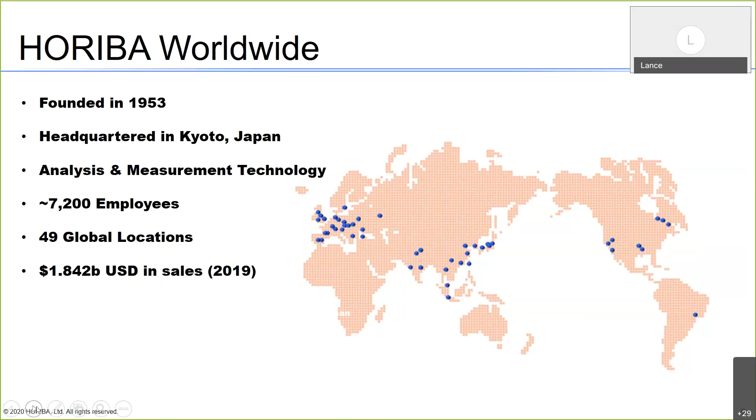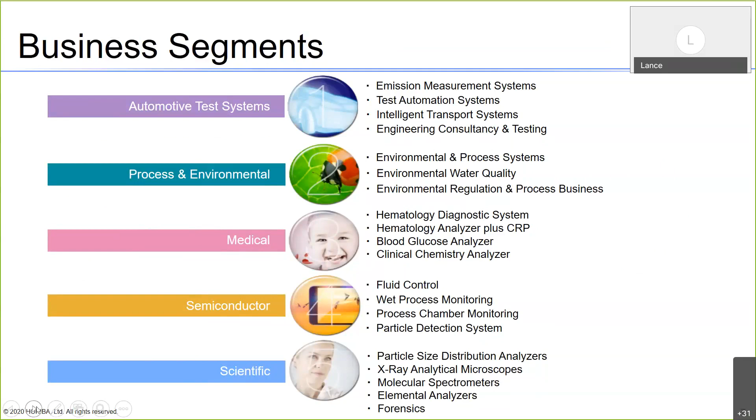So where does that 1.8 billion come from? Well, there's five different divisions under the HORIBA umbrella. There's the automotive test systems. There's the process and environmental, obviously that's ours, which also includes water quality. We have the medical, we have the semiconductor, and we have the scientific division. So all of these divisions make up the company that you know as HORIBA.

Specifically to the Americas, you can see here, these are all of our sites in both North and South America. For the Process and Environmental Division, we are specifically located in Irvine, California. We have some project management and admin all handled out there. And then we have our new office that we opened back in 2018 in Pasadena. If you're not familiar with Pasadena, it's a suburb of Houston, just a little bit southeast. So we're very close to quite a few of the major petrochemical players down there.

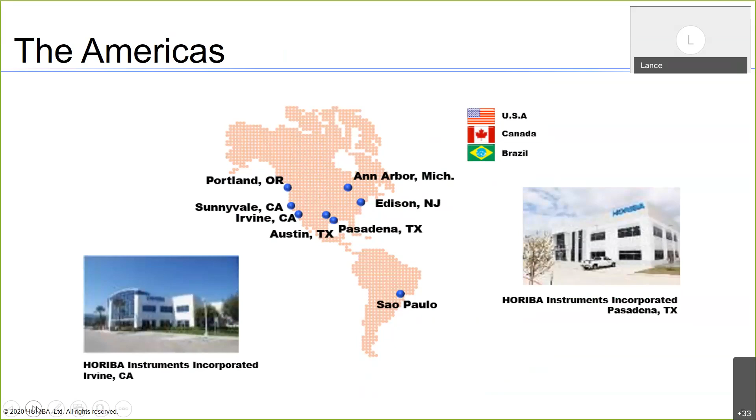A bit more detail about the HORIBA Houston facility, HORIBA Pasadena. It was originally founded back in 1985 by Cameron Process. We purchased it in 2012 and opened this shiny new building back in 2018. It houses 100% HORIBA employees. And who are those employees? They are CAD designers, project managers, electricians, mechanical engineers, manufacturing, inside sales. Norio's office is actually in this building, so quite a bit happens.

We're very happy about the manufacturing capability as it stands now. With the exception of the PG portable analyzer, which was also one of our webinar series topics, all of our products are now manufactured out of the Houston office, so we're very happy about that.

Some general overviews as far as what some of the capabilities are from our Houston facility. We can do analyzer shelters, analyzer racks, analyzer enclosures. We've got quite a bit of flexibility from that perspective. That's all the way from engineering, design, fabrication, to project documentation, installation, commissioning, you name it, we have experience doing it. We offer field service and embedded service contracts.

So if you need a preventive maintenance call, or if you need support, we can certainly offer that. And if you have multiple HORIBA units, we can explore the opportunities as far as having embedded service personnel at your facility to make sure that those analyzers are up and running on a consistent basis. We also offer RATA testing. If you have any questions about that, please feel free to reach out to Mick or myself, and we'll be happy to have that discussion with you.

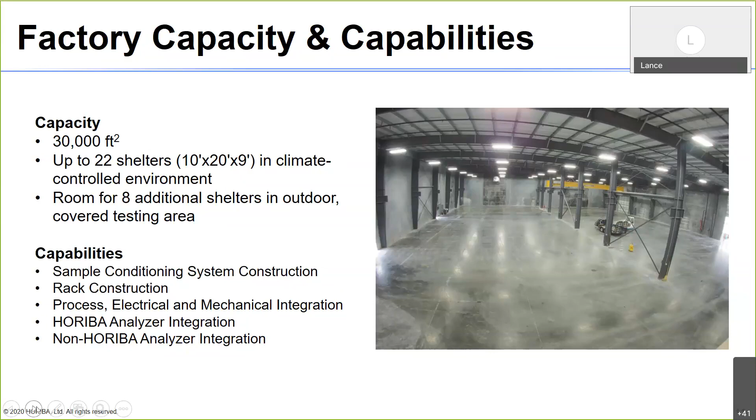But I think a little known topic is our ability to integrate non-HORIBA analyzers. If you have an analyzer, say you have a GC, or you have a mass spec, or a turbidity or opacity, if you have one of those analyzers and you need to put it into a shelter or enclosure, we have the experience to be able to do that. We've done it with multiple different vendors. And so if you have a need for that, please reach out to Mick or myself, and we'll be happy to help coordinate that with you.

The products that we offer, obviously, there's the process gas analyzers, which is the GA-370, the topic for today. We have ambient air monitors, process gas analyzer as well, the VA5000, the multi-gas analyzer. That was also one of our webinar series topics. Go to our YouTube page. The PG300, our portable gas analyzer, also on the YouTube page. You'll find that webinar. The flagship of all of our gas analyzers, our CEMS unit, the ENDA-7000, and then the particulate monitor, the PX375.

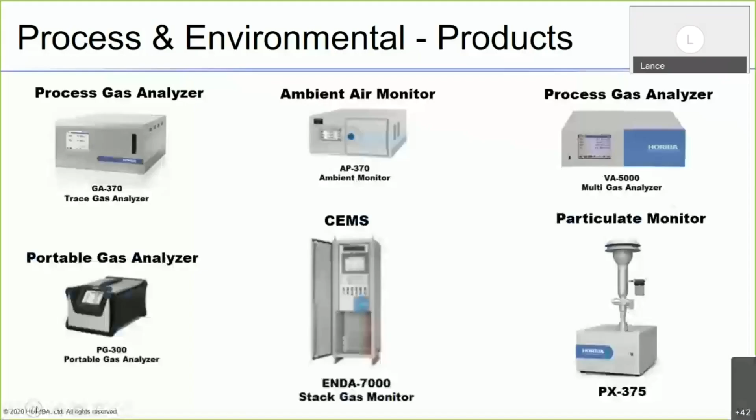All right, thanks, Lance. Good morning, everyone. My name is Norio Kobayashi. I am a product specialist with HORIBA. I've been with HORIBA for about 15 years, from Japan, and transferred to the US and working in the US for 6 years. Today I am so happy to show you the introduction of the GA-370, which is the trace gas monitor. And here is today's outline: the product overview, the applications, and why GA-370 is recommended for those applications.

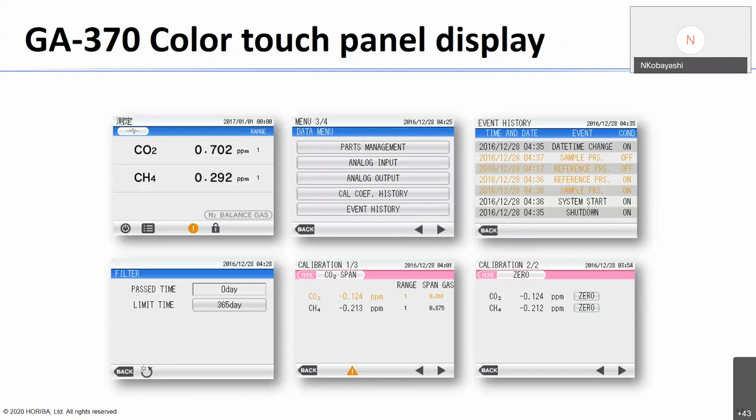All right. The next page is showing the comparison table compared with other companies' ones. As you can see, the GA can pick from many selections like CO, CO2, CH4, N2O, SO2, and siloxane, while the others have fewer selections. And also you can measure up to 2 parameters, while the others measure only 1 parameter, which is a great advantage.

What you need for the operation is reference gas. You will need to prepare pure nitrogen or clean instrument air. If it's not clean enough, we can prepare a purifier unit, so we can clean it up to produce reference gas. For the range setting, you have 1, 2, 3, 4 range settings right there, from 1 ppm and 2 ppm, 5 ppm, 10 ppm. So you can have multiple ranges there.

And when you look at the repeatability or linearity, you can see plus minus 0.02 ppm, which is very, very good compared with the others, like 0.1 ppm or plus minus 0.1% full scale. So that is the great performance here.

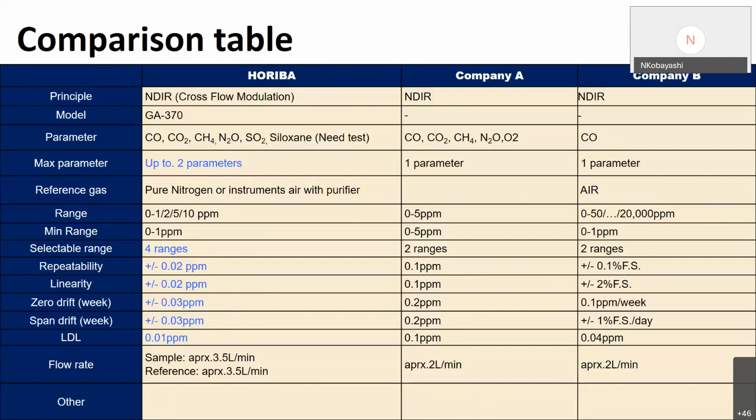All right, let's talk about some applications. Air separation unit, the cryogenic air separation process. They use the differences in boiling points of the components to separate air into the desired products, like oxygen or nitrogen or argon. So they just put in the air, separate the components inside, and extract the necessary components to produce their products.

These three gases, oxygen, nitrogen, and argon, represent about 99% of dry ambient air. Nitrogen is about 78%, oxygen about 21%, and argon about 0.9%. The rest of the other gases must be removed properly in the air separation process. The target components will be water vapor, carbon dioxide, and hydrocarbons.

The reason why we need to remove those is to ensure safety, efficient plant operation, and product purity. We want to keep an eye on each important point, to make sure those other gases have already been removed well. So that is the role of the trace gas analyzer. Again, the role of the trace gas analyzer is making sure each process worked well.

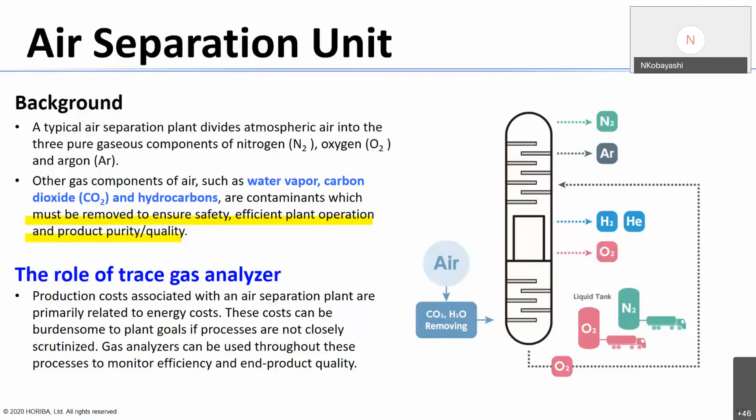Before you go to the next process or final product stream, you want to make sure its quality is good enough to go to the next stage. If it's not enough, then you will need another round of the process. This will sacrifice a lot of energy, cost, and time. So monitoring each point contributes to proper operations.

Let's go deeper into air separation. So this is the rough sketch of the separation unit process. The ambient air goes through the filter, which captures all of the dust in the ambient air. And the air is then compressed and goes through a molecular sieve process to remove H2O and CO2.

Because if the forward process contains H2O and CO2, the formation of ice or dry ice may occur in the cooling process. The cold box inside is going to chill the air to minus 173 degrees C. It's extremely cold. So before entering the cold box, you want to remove H2O and CO2 completely. So now I guess you understand why monitoring CO2 with high sensitivity is extremely important. Because CO2 in the air has to be zero.

Then the cold air goes to a distillation process, and your gas is going to be chilled more. And at each point in the distillation process, the gas comes off as product streams: nitrogen gas, argon gas, and oxygen gas. Each product stream comes off at a different point.

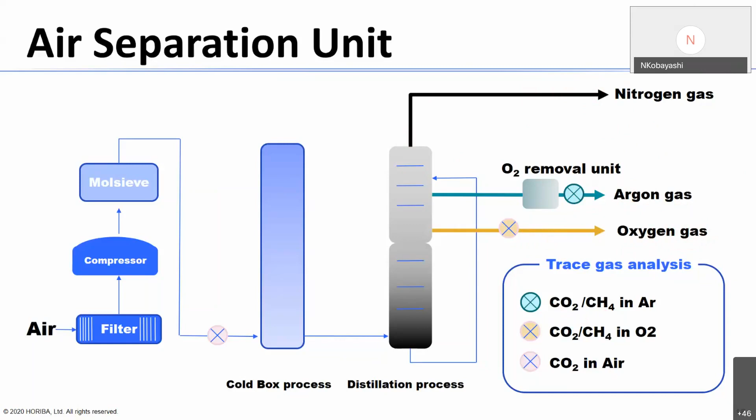Here's more explanation of each sampling point for trace gas monitoring. The trace CO2 measurement before the cold box process: like I explained, the CO2 needs to be removed from the feeding air prior to introduction to the cold box process. Also, you may want to monitor after the cold box process to see the efficiency of the heat exchangers. So typically, the CO2 monitored in this process is in the 0 to 10 ppm range.

The CO2 and the CH4 are monitored in O2 product streams right there. And the CO2 is an especially unwanted component in the product streams because of the oxidizing potential. And the typical measurement range at this point is 0 to 1 ppm, and at some points could be maybe 10 ppm.

Another trace CO2 and CH4 measurement is in argon product streams, right there. The typical measurement range is 0 to 1 ppm. So you are required to measure extremely low concentrations, low concentration control at this point.

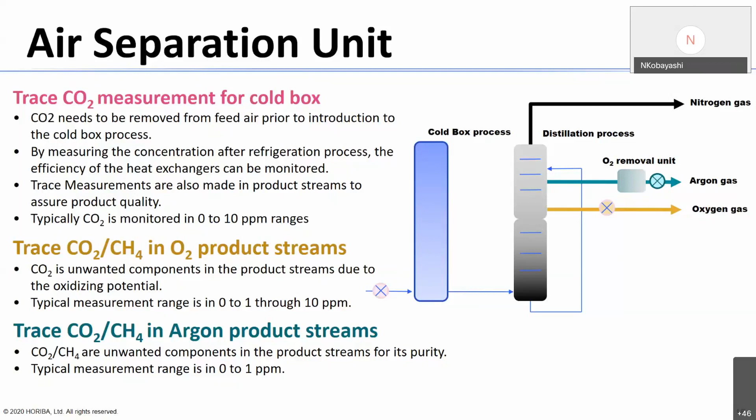So I guess everyone understands why it is so important to measure trace gas with great performance at the low concentration range. And now the question is, what should I pick for that monitoring system? Or why do you think HORIBA is good for those applications? Let me address those questions one by one. Let's look at the features again.

The GA-370 has excellent accuracy. The linearity is plus minus 0.02 ppm. Thanks to the HORIBA patented technology, cross-flow modulation, which is a HORIBA developed technology, the HORIBA GA-370 achieved world-class accuracy. Linearity of plus minus 0.02 ppm is one of the greatest performances in NDIR.

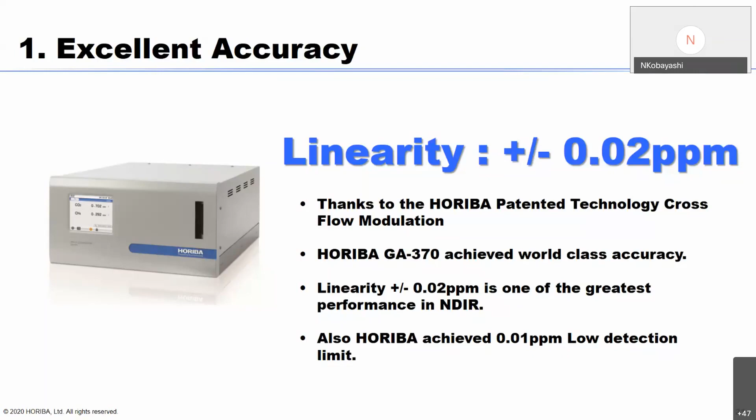And when you look at the low detection limit, it is 0.01 ppm right here. This is also remarkable performance. I want to explain why HORIBA can achieve that level. Everyone is using the same NDIR technology, so why do we say only HORIBA can achieve that low level? There's a lot of trick here. I want to explain why HORIBA could do that. Actually, it's because of the cross-flow technology. Let me explain in detail.

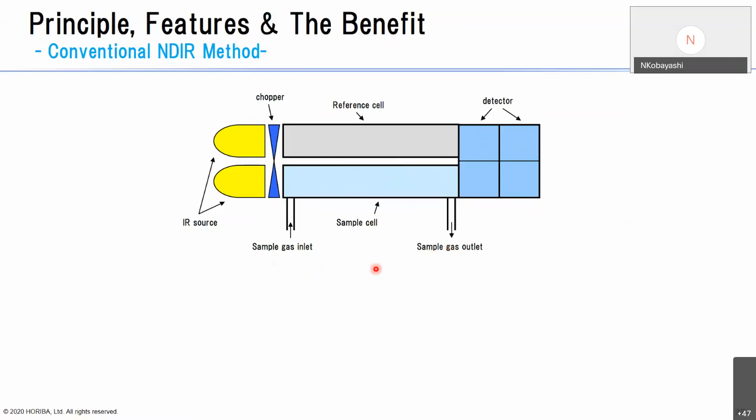Before I explain the cross-flow technique, I would like to go step by step. First of all, I would like to show you how the conventional NDIR works. I'm showing the picture. This is the conventional NDIR method. Basically, it has two light sources, a sample cell, a reference cell, and two detectors right there. Okay. And the sample gas travels from inlet to the outlet like this. And the light goes from the light source towards the detector like this.

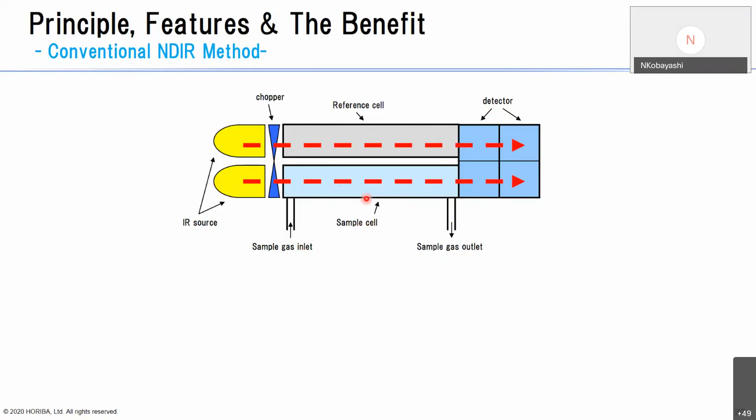So the detectors are reading the difference in absorption of the light between the reference cell and sample cell. So they're looking at differences between the reference cell and sample cell. But you keep introducing the sample gas into this cell, and the sample gas may have some dirty stuff in it, and that may stick to the inside of the cell, and that will cause a drift. So there's some lifetime here because you are running 24/7. You keep introducing the gas inside here, right?

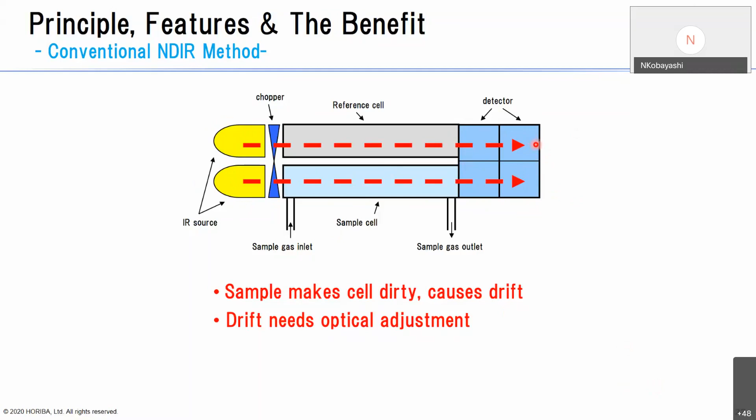And a drift needs optical adjustment, and also you never know the lifetime of both light sources or both detectors. So you may not have the same power from both light sources. That may need to be adjusted, right? And also detector sensitivity could be different. So that may be another factor causing error. So the balance of the light source power and sensitivity of the detector is pretty important in this case.

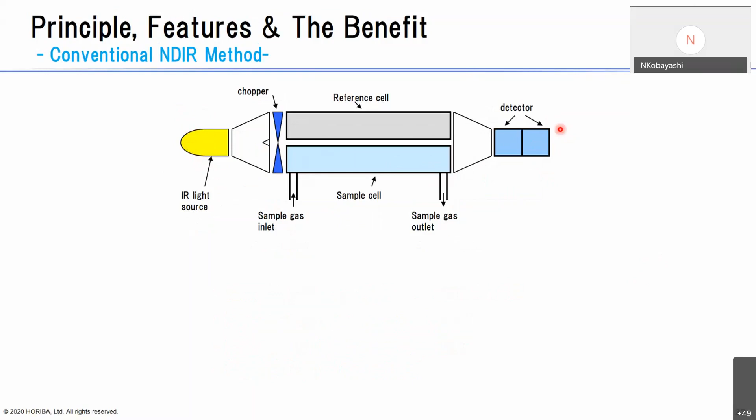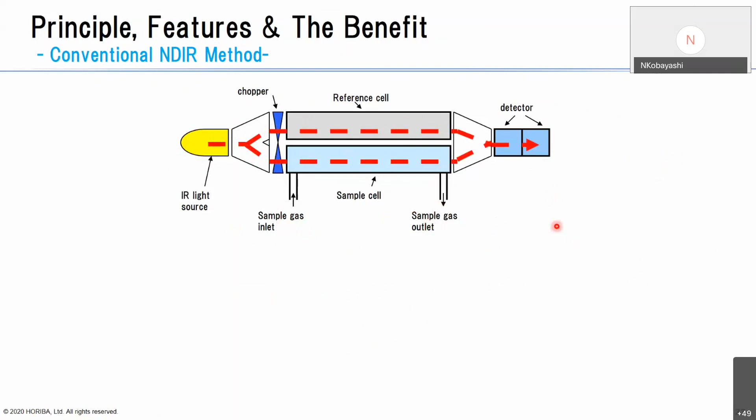So somebody developed another way to overcome the issue, which contains one light source and one detector. So you don't have to worry about the differences between two light sources and two detectors. What you're doing here is splitting the light power like this, and half of the light goes into the reference cell, and half goes into the sample cell. Okay, but still, the sample gas is traveling inside the sample cell 24/7, and that could make drift. So the sample makes the cell dirty, and it's called drift. Like I explained, drift needs optical adjustment.

And there's another point. You have to split the light power equally, 50% and 50%, and this might be affected by vibration in the plant or the laboratory. Even in a laboratory, you move the analyzer from place to place, and that could cause a different alignment, and that will cause an error in the balance of the light split power. So in that case, you will need a technical person from the manufacturer to make an adjustment. That is one of the critical problems in this case.

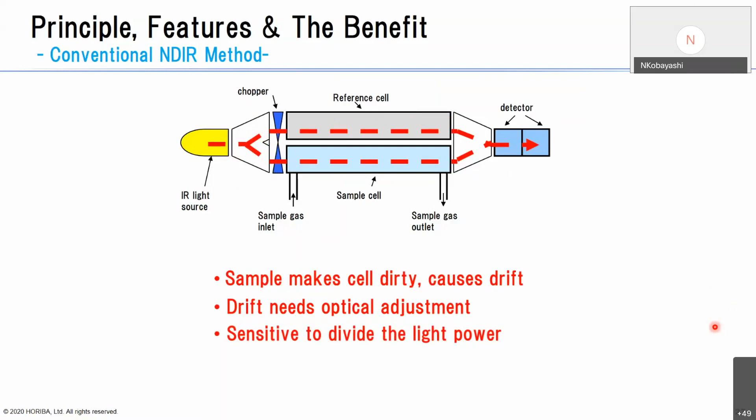HORIBA cross-flow modulation consists of basically one light source, one cell, and one detector. So that's the minimum configuration. You also have solenoid valves here. What you're doing is introducing the reference gas, and right after that, the sample gas, switching the gases alternately each second.

By doing this, you don't have to worry about differences between the light source and detectors, or about the cell getting dirty inside, because the reference gas is clean and the sample gas is not. While introducing the reference gas, it helps purge inside of the cell, which keeps the lifetime lasting longer than anybody else. That's how cross-flow modulation has been proven for longer lifetime.

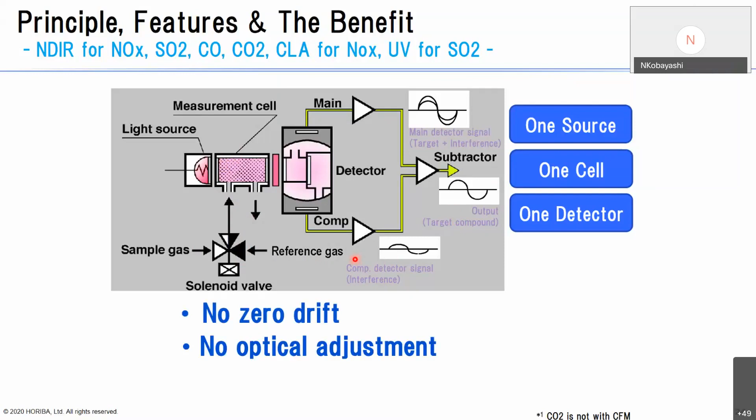Every second, you're watching zero by introducing the reference gas. So every second, small adjustments happen automatically. No zero drift occurs, and no optical adjustment is required. The automatic cleaning and purging of the cell is done by this method.

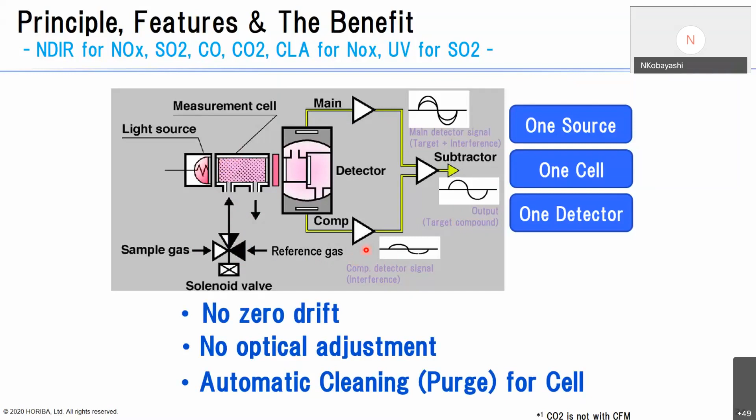The GA-370 brought cross-flow modulation to the next stage: dual cross-flow modulation. In this method, we use two light sources, two cells, and two detectors. I don't want to confuse you, because earlier I explained the simpler design with one detector, one light source, and one cell. Now we're talking about two light sources, two cells, and two detectors. Here's what we're doing.

There are two solenoids: one for the sample gas and one for the reference gas valve. The essential new element in this design is the solenoid valve, which alternately directs the sample gas and reference gas to the cells of the analyzer. The detector then reads the difference in absorption between the two cells, which creates a signal response like this.

So let me show this. While introducing the sample gas into this cell, the sample gas travels this way, in and out. The reference gas goes into this cell, and out. In this case, the span signal looks like this, going from 0 to span. You're watching the difference between zero and the span.

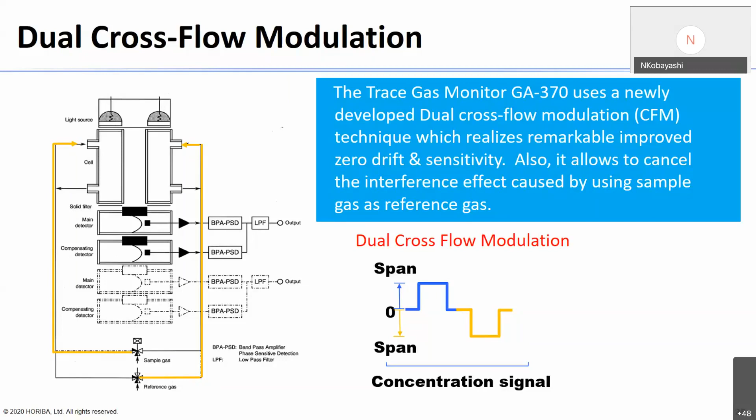Let's take a look at the flow schematics. The sample gas is actually split into two lines. This is the analyzer schematic. The sample gas travels into the analyzer detector, but before that, the gas is split into another line, which is a reference line. We purify the sample gas to make a reference gas, and it goes into the analyzer detector. So what you are doing is measuring your subject sample gas while producing the zero at the same time. You are alternately measuring the sample line and the reference line.

This is the idea behind cross-flow modulation. If you don't use the purifier unit, that's fine, you can just provide 99.9999% nitrogen instead of the purifier unit. So that is the reason why we need this utility.

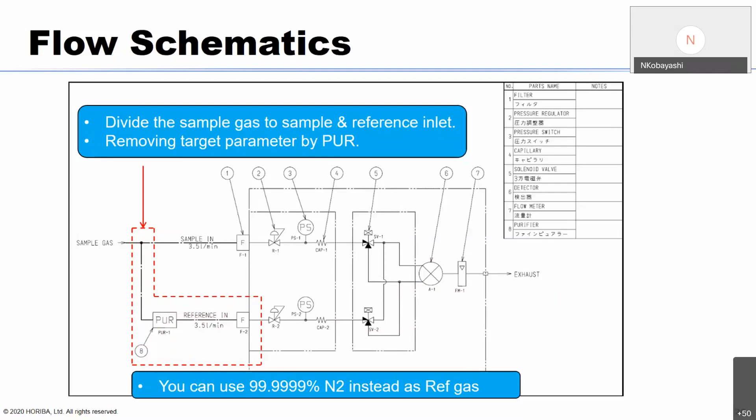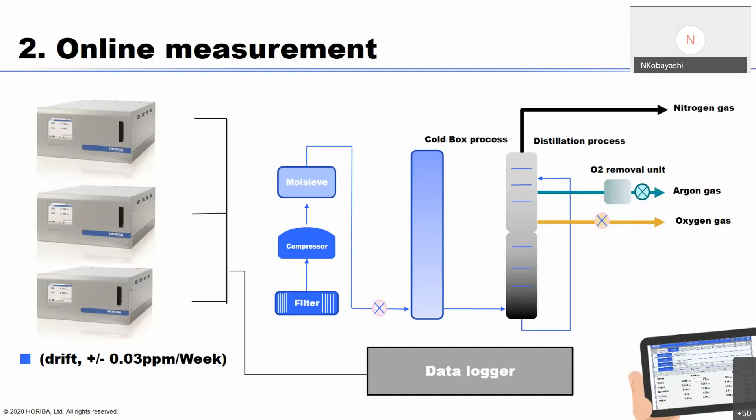And it is cost effective. Finally, GA-370 gives a great price benefit since it can hold up to 2 parameters. As you know, trace gas measurement by NDIR requires a long cell, and this gives a limitation inside the room of the analyzer. That's why other companies can offer only single components for that lowest range, for low concentration measurement. HORIBA has a patented technology, cross-flow modulation, which makes it possible to house 2 analyzer detectors in the box because we don't need a longer cell. Cross-flow modulation can detect lower concentration, and dual cross-flow modulation helps detect even lower concentration. That's the reason we could have 2 parameters in there. With that, all of the electronics and the touch panel operation can be shared, so we offer it with great pricing.

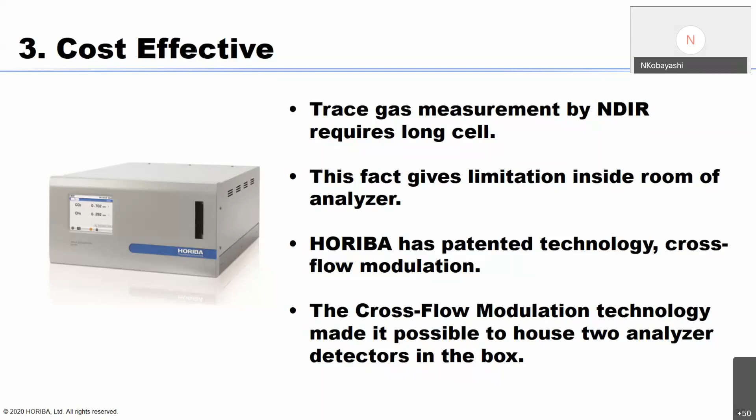Lastly, I'm going to show you some friendly user interface. Actually, this interface is from a portable gas analyzer, the PG-300 series. But the user interface itself is very similar to this, and as you can see, there's a measurement range, and you can touch this to switch the measurement ranges.

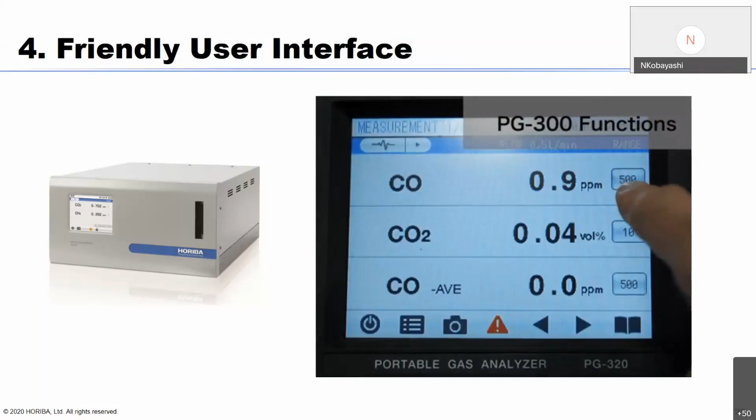If you are interested in this PG portable gas analyzer, you can take a look at our YouTube channel. We made a webinar explaining those products in detail. As you can see, the touch panel makes it easy for all operations, and you can switch ranges easily. It can also show a small measurement trend graph if you click, and calibration can be done by entering the exact concentration.

Okay, let's wrap up. The GA-370 uses dual cross-flow modulation, and CO, CO2, CH4, N2O, SO2, and siloxane can be measured, and you can select up to 2 parameters. It has a 1 ppm range, giving great repeatability and linearity, and the drift per week is excellent enough for continuous measurement. I hope I could show the capability the GA has, and thank you for your time today, and I'm happy to answer questions.